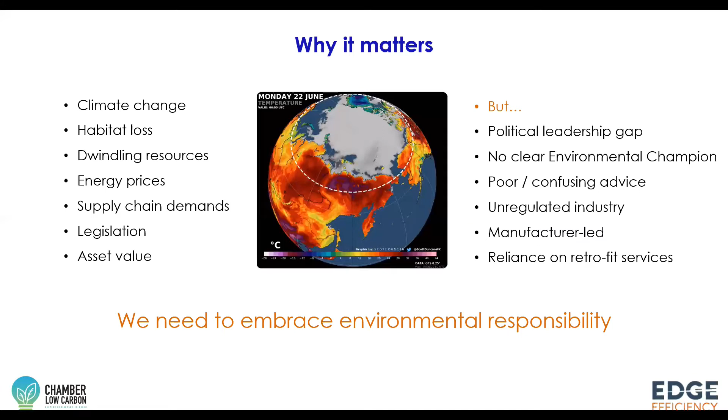So I think from the perspective of companies across all sectors, the impacts are also going to be felt in terms of increasingly challenging environmental legislation, although obviously much depends on the government of the day in that respect. But there's also stakeholder pressure from various directions to be responsible and sustainable. And you've obviously got the ultimate bottom line hit of increasing energy costs. They may have had a slight wobble in the context of unexpected demand reduction during COVID, but if you look at the history and the trajectory over time, there's a fairly clear message there, and that's only going one way, and energy is going to increase in price.

Next slide again, please, Chris.

So at Edge, what we try and do is to take the view that whilst there are some common principles, every building really is different, every business is different. So it's important that we understand our clients' circumstances and objectives so as best to be able to plan an effective energy improvement program. It makes a huge difference, for example, if the buildings are owned or leased by the company, and how long the client intends to be at their current location. If you don't own the buildings, it can make less sense to invest in fabric upgrades unless you have the landlord on side and contributing to the cost, because he understands the longer term objectives and values.

I also like to think that we take the starting point as understanding what our clients have already and whether there are really good opportunities to improve it. The answer isn't always expensive new kit. It might be to simply improve the operation and control of the systems that you already have. So we do try and understand those aspects before we start suggesting wholesale changes and the like.

Okay, next slide again, please, Chris.

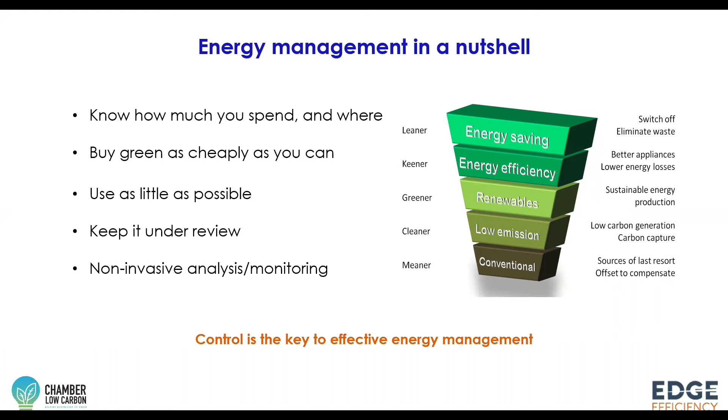Okay, I'm going to hand over the baton to John, who's going to look at some further technical aspects of buildings and insulation. Yeah, next slide, please, Chris. Thank you very much. I shouldn't be saying this as an architect, but buildings are simple. And fabric improvements don't necessarily fall into the large capital cost sort of investment envelope. It can be planned maintenance and general maintenance, just making sure that the things that are being done are right and they can be phased over a period of time, so they're not

influencing adversely. Sorry to butt in, John. You're just a little bit quiet on my end. Is there any way of just increasing the volume? My volume? How's that? That's better. Yeah.

We tend to focus on our houses in terms of energy costs, whereas business costs in terms of energy tend to be wrapped up in overall costs. And I think those need to be extracted so we know where the use is. And we need to target areas where the heat is going. And the first and foremost is to stop air leakage from a building. If you want to reduce your energy costs, then air leakage is the start. And not just from the inside to the outside of the building, but between spaces within the building. I think that's fairly critical. So you're looking at the use of the building and the layout, not just the overall expenditure. Thank you, Chris.

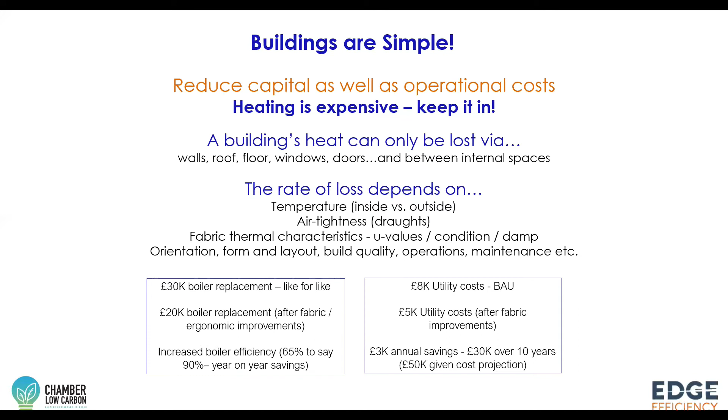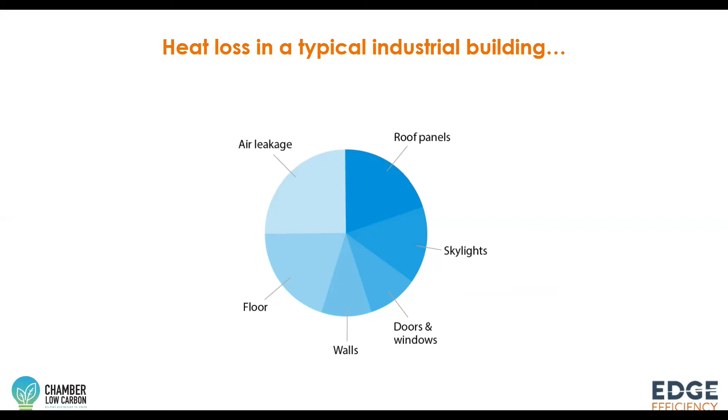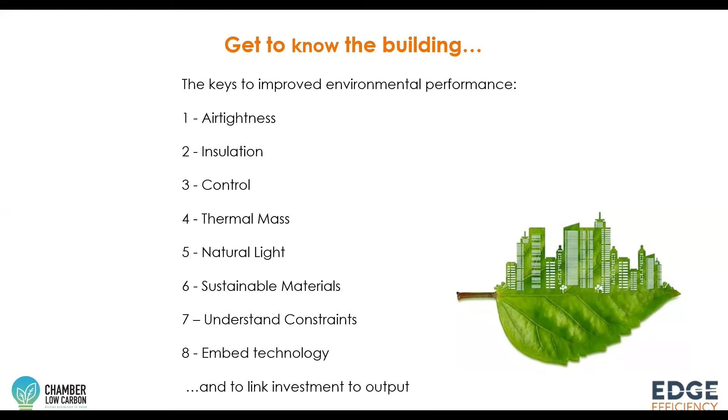Our hierarchy really is to do the simple things first. Go for the low-hanging fruit, understanding your building better, and target improvements so that you're going to get a bigger bang for your buck for that level of investment. Obviously, you can improve the heating system, but I think going through the assessment of what you have and maintenance and condition and looking at your energy use in certain areas should be a precursor really before you start looking at installing renewable technologies. Thank you, Chris.

Andy, I think over to you for legislation. Yeah, absolutely. Thanks, John. So a question that we are often asked concerns what the minimum planning authority requirements are for building energy efficiency. And the answer is almost always that it depends. Some authorities don't specify any specific requirements of their own, and obviously therefore the minimum would be the building regulations and specifically Part L, which deals with the conservation of heat and power in buildings.

And I think, as we probably all know, this has been incrementally tightened over the years, and another review is imminent. I think the original intention was for a new version of Part L with revised, improved standards to further pursue the national net zero emissions target, originally going to be last year, but obviously that was scuppered to a degree, I think, by the pandemic. So I think the latest expectation is that Part L will be released in October or the back end of this year, and is likely to come into effect from April next year, although that's still to be confirmed.

There were two versions of the revised Part L as part of the consultation exercise that the government ran, and they obviously had different requirements, but the signs at the moment are the government's poised to go for the tougher option, which is basically going to require a 30% improvement in overall carbon emissions compared with current standards. Now, this is going to be a huge leap, especially given that the most readily achievable measures have already been implemented.

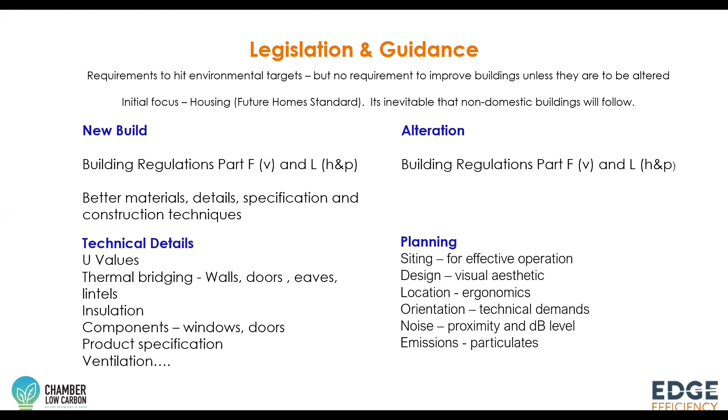And it's really going to require far-reaching changes. You know, we're already starting to hear conversations about the phasing out of gas as a fuel in buildings and increasing use of heat pumps, for example. But it's also going to have big implications for fabric improvements and enhanced air tightness. Okay, back to you, John, for the next one.

Thank you. Yeah, just want to pick up on a couple of case studies, a bit of experience, that hopefully will be of value in terms of a strategy for businesses looking at improving the insulation of their buildings.

So in that instance, the offices were a mezzanine level within the main operational space. So we looked at insulating around the offices, the floor and the roof and the walls. So that became a semi-autonomous element of the building. It reduced the cost of upgrade, but improved the working conditions considerably.

And the other thing we did was specify insulated fast roller shutter doors. And obviously, if you've got a big warehouse with doors outside, it's about your volume of heat loss from the building. So if you can put those doors in different places so they're not open at the same time, that can be extremely beneficial in volume of air that you might otherwise lose.

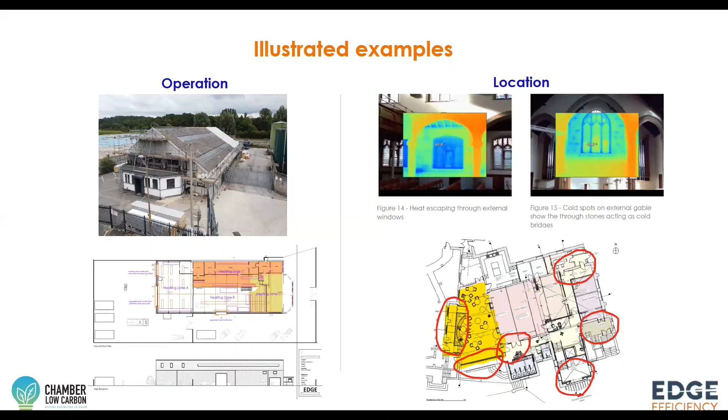And then in this instance, we looked at lobbies and airlocks to reduce drafts into the main occupied spaces. So again, it's the ergonomics of the space and how the air flows around the building. So stopping that, certainly if you tackle that with appropriate ventilation, can be a very cost-effective way of approaching improvements in insulation. Next slide, please.

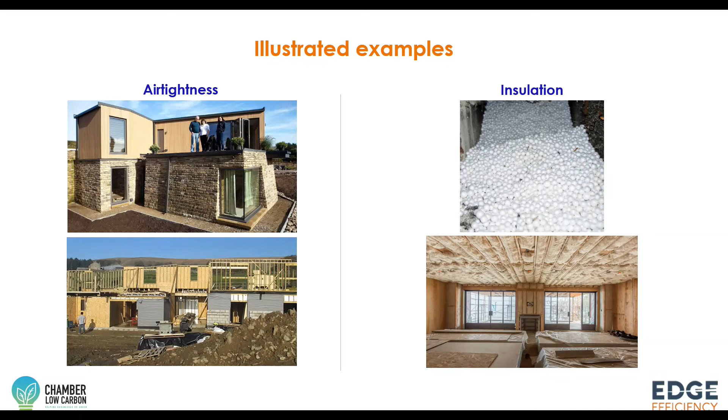I've mentioned finance and mortgages. As I say, some techniques are not really supported by the banks because of on-sale value of property. And in a number of cases, guarantees are required, and therefore a specialist installer is fairly key. Next slide, please, Chris.

We're continually monitoring against building energy use and operation, and the materials and techniques are improving all the time. So what you do this year might be slightly different next year, and keeping abreast of those improvements in technology can certainly help in terms of the long-term plan for the enhanced environmental efficiency of your particular building.

Thank you. Andy, I think you're on the next slide. Thanks, John. Yeah, next slide, please, Chris.

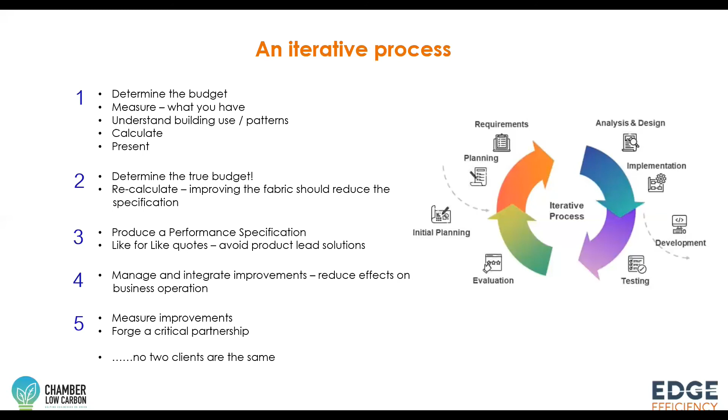Yeah, I think just by way of wrapping up, hopefully John's got into some of the technical details there. But what we would say in summary is that there is no single, easy, widely applicable solution to improving a building's energy performance. The key really is to undertake a detailed assessment of your assets, to understand which elements currently perform well, and those which may need attention, as a starting point.

So once you've got that, you can then prioritize potential actions in terms of costs, savings, and taking into account practical considerations such as the impacts on your ongoing business operations, getting work out of the door, and also your wider organizational goals, really. Next slide, please, Chris.